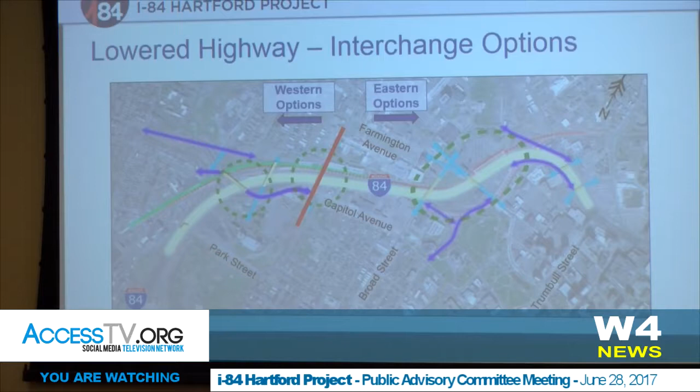So I'm going to jump into a western option here. This is the western interchange option we're recommending as part of that reasonable range of alternatives. The yellow shapes indicate at-grade roadway pavement, the orange are bridge structures, and the light blue are potential property impacts.

With Park Street here at the bottom, we've zoomed in a little bit, and Sigourney Street is towards the right of the map. Coming over Park Street, you'd have an eastbound off-ramp and an eastbound on-ramp from Laurel Street, located just south of Capitol Avenue. Capitol Avenue would be reconstructed to pass over I-84 and over the railroad, whereas today it goes underneath. There'd be a westbound off-ramp and westbound on-ramp coming to Capitol just a little bit east of Forest Street.

One of the big pieces of this option is a new potential road connecting Hawthorn Street over towards West Boulevard at Sisson Avenue. That second east-west roadway is crucial to the success of this alternative, both from a traffic perspective and from a knock-on effect where the roads are smaller and more manageable, better for bicyclists, pedestrians, and transit users.

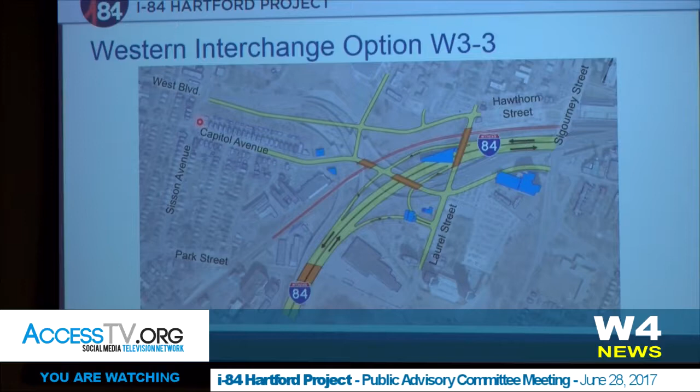So I'm going to shift over to the east now. Sigourney Street is on the left side of the map, with Trumbull Street and Ann Street towards the right and I-91 just off the page. This is interchange option 3B-E6(S), one of the three options we're proposing to advance to the DEIS. I'll walk you through some of its characteristics and then explain key differences to the other two options.

Here's the eastbound on and westbound off-ramp at Sigourney Street, with the highway passing under Sigourney Street. The red line is the railroad where it would come off its existing alignment. This orange section is a tunnel that would carry the railroad beneath Broad Street, Farmington, and Asylum, with the station located likely in this vicinity. Gina will be touching on that in the next few slides.

In terms of the interchange ramps, we'd have those Sigourney Street ramps I mentioned, and then eastbound we'd have off and on ramps from a new north-south road connecting Capitol Avenue to Asylum, continuing as Spruce Street with an extension beyond where Spruce currently ends at Church. We'd extend that up and around into Chapel Street South, creating a frontage road system.

All those pieces I just mentioned are consistent across these three interchange options as I move forward. The changes you'll see are in this area, north and west of the highway towards Asylum Hill. In this 3B-E6(S) option, we have a westbound off-ramp and on-ramp connected to the Myrtle Street, Edward Street extension, which ties down into Cogswell, creating one continuous north-south road between Asylum and Walnut Street. I'd like you to focus on this area as I page forward to the next interchange option to see the differences.

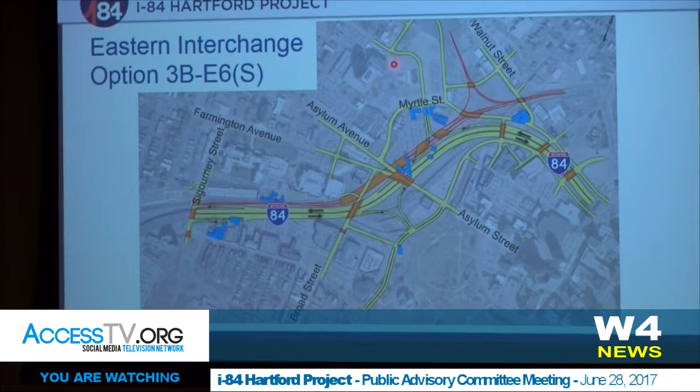So again, Christine's going to talk a little bit more about the DEIS schedule. Ultimately that process, looking at all those different NEPA characteristics, will help us come to what we feel will be the right conclusion as to a preferred alternative. So with that, I'm going to turn you over to Gina to carry you through the station.

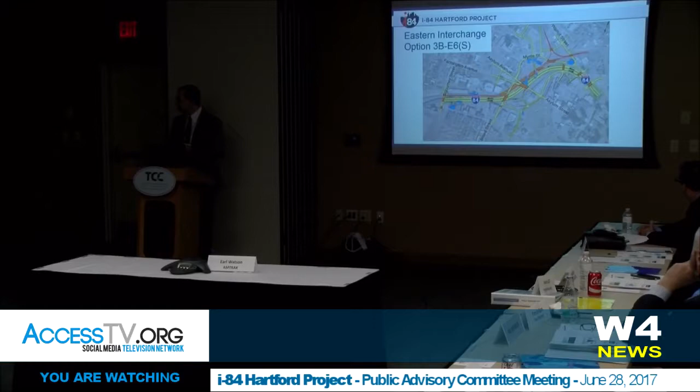Thank you. So as you're well aware, we are studying different transit station alternatives in what we're calling our multimodal station study area. This is a 20-acre site. Asylum is on the south, Cogswell's on the west, and the existing Union Station is on the east. The tracks are going to be relocated to the west about 1,000 feet, so that is the area we're looking at. It's about a 4-minute walk between the existing Union Station and the new relocated tracks to the west.

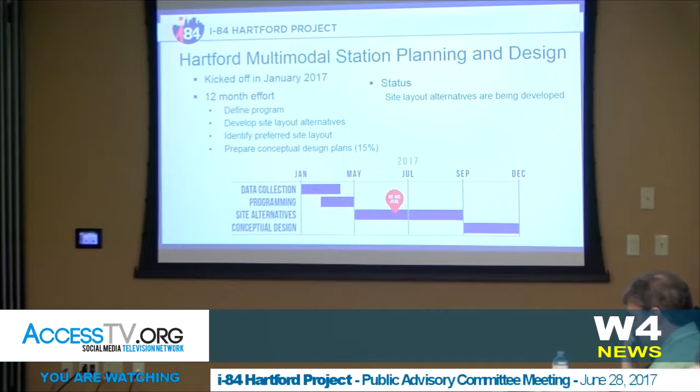We started in January. We were at the PAC meeting previously to talk about the schedule. It is a 12-month effort for what we're calling 15% design plan. So that's really locating a station layout, not designing the building per se.

So we've completed our data collection and our programming phase. That was when we sat down with the various stakeholders and users of the station and identified what type of spaces they would need in the future for their riders, their offices, their ticket agents and so on. So we've completed that programming phase, and that data is what we've used to lay out the various station alternatives on this 20-acre site.

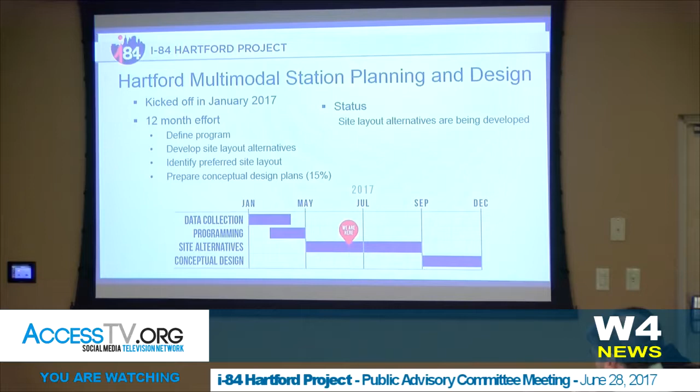So we presented at the Open Planning Studio in April. We did present 4 different station alternatives. Since that time, we've added some more, so we're now up to 7. And we did also present these concepts to what we called our Transit Technical Committee meeting, TTC meeting, where we received input from various members of the public, stakeholders, and the TTC members.

And we keep hearing a lot of the same recurring themes. We hear that there's a need for a seamless connection between bus and rail. Right now, at Union Station, we have local buses stopping, we have Greater Hartford Transit District paratransit vehicles stopping, and we've got intercity bus, Peter Pan and Greyhound stopping. The rail is now going to be moved 1,000 feet to the west. What do we do about the buses? So we understand that there needs to be some type of connection between the bus and the rail folks.

The station should act as a main regional transit center. It should also be a gateway to downtown Hartford, and to Bushnell Park area. There should be a strong pedestrian and bicycle connection. I think that is true throughout the entire project. We keep hearing that's important.

The options need to support the viability of Union Station, a historic building, and how best we can do that given the different station layouts, whether it supports transportation functions in the future, or it turns into something else, but whatever we do needs to support the viability of Union Station.

The rail tracks will be relocated at the early part of the project. 7 to 10 years later, depending on funding and how it's built, the lowered highway alternative will be built. The track level and the lowered highway alternative are at the same level, so that's the lower level of any concept we're going to be showing.

We also have safety and security concerns we need to worry about. Some of our concepts, not concept A, but future concepts I'll show you in a bit, have construction over a cap over the highway. We're in discussions right now with FHWA, FRA, and FTA about their guidelines for constructing transit stations and parking over highways, and what that means in terms of security and safety.

The other thing we need to worry about is access. As I said earlier, this station will be accessed by vehicles for the parking structure as well as buses, and what does that mean in terms of the street network around that?

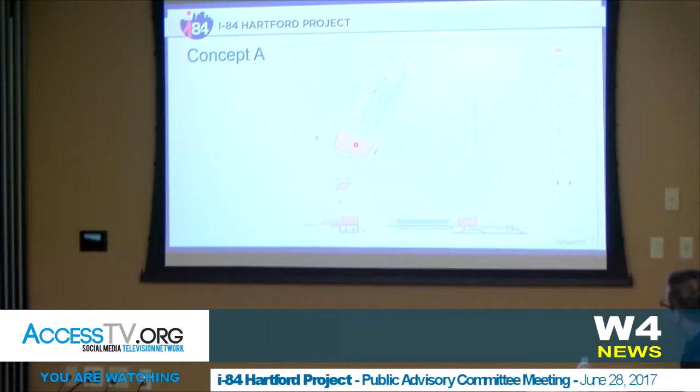I wanted to go a bit over the color coding too. The purple on each concept represents the transit station, and the transit station is going to be built at different levels. It starts at the platform level, which is at the same level as the lowered highway. In most of the concepts, above that will be a concourse.

That concourse will allow passengers to get off the rail, go up about half a level, and transfer under Asylum Street to the other side, so that they can cross Asylum Street to get on buses on the south side, or to get on sidewalk connections and go west and east at that point.

Above that is considered level 1, which is the Asylum Street level. Then, depending on the concept and the square footage of the station, there will be 2 to 3 levels above that, or 1 to 2 levels, so it may go up to a 3-level high station and parking.

Each of these concepts also shows bus bays. The blue represents local bus, Connecticut Transit local buses. The green to the right in this concept would be intercity buses, that's Peter Pan and Greyhound. We're also suggesting some employer shuttle buses, something we're also studying, so employers can operate shuttles between the train station and their places of employment if they desire to do that in the future.

Not every concept I'm going to show you shows the different levels, but I'll explain what's going to be on each level. So for concept A, this is what you would consider a true multimodal station.

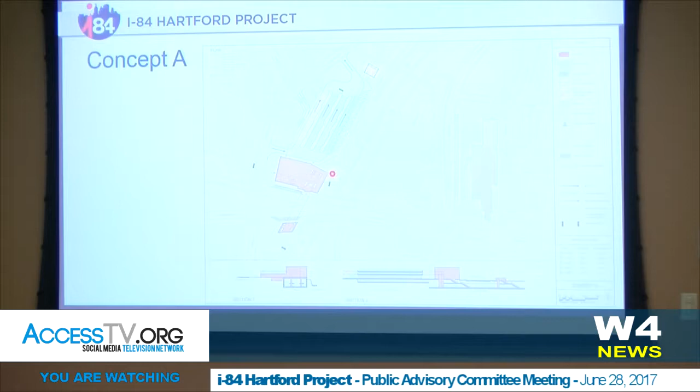So if passengers want to transfer between the rail and the bus, they would walk across Asylum, that 4-minute walk, and get to their bus, and then go to their place of employment downtown, or go to New York, or wherever they're riding on intercity bus.

In this case, the levels are the same, where this is level 1, Asylum Street level. Above that would be the kiss and ride taxi stand within the parking. There'd be a small parking facility above, structured parking.

This access, and I should be talking access too. We should be looking, as we look at these drawings, you should also notice the access. In this case, we're just talking about employer shuttle and some parking, structured parking above the employer shuttle. So that would be the vehicles coming in and off of Cogswell. The other bus vehicles would be coming off of Spruce Street. In the previous example, Concept A, everything comes off of Cogswell.

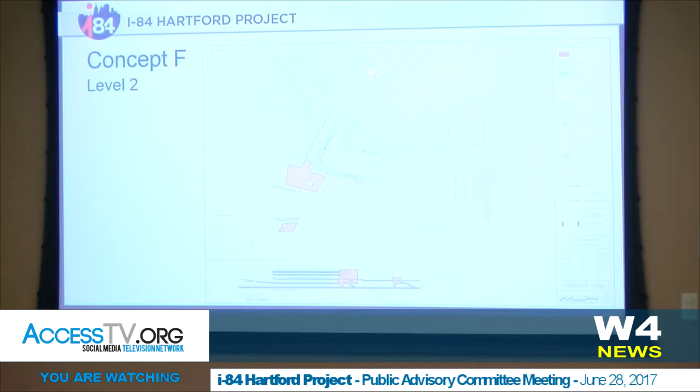And again, in this case, the access is both off of Cogswell as well as off of Spruce Street, depending on which level of parking. Excuse me, can you just show us where CT Fast Track would come into this mix? Because I'm getting a little confused, how does CT Fast Track afterward come in?

Right, for right now, CT Fast Track, for all these options except the last one I'm going to show you, will just operate on street as they do now along Asylum. The reason we would have a concourse to catch buses on the south side of Asylum is because you can catch local buses as well as CT Fast Track there. So we're not anticipating CT Fast Track to be pulling into any of these station options. They would just operate how they do currently along the street once they get off the dedicated lane.

Well, where would the dedicated lane come into this picture? It doesn't—it stops. Maybe Dave or Tim, do you want to explain? At this point, it just stops south of this station area.

Yeah, we're currently evaluating CT Fast Track options and station options at the same time, and we do have various guideway options that we're evaluating now. Some of them would terminate at Road A or Bushnell Park West, which would be very similar to what's out there today, but it has a high cost, and we're looking at other options in between as well. So we haven't come to a conclusion on CT Fast Track yet, but we are evaluating.

But would they be considered the same as Connecticut Transit? No, there would still be CT Fast Track buses, but it's really about where does the guideway end—does it end exclusively at this street or that street? So we're still evaluating that.

Because once you relocate the railroad, now the busway is on the other side of the railroad. So how do you get that across the railroad and then to the highway? It's either going under the highway or going over it, so there are pluses and minuses for that.

Now, concept G, I'll give kudos to Bill, if he's in the room. At our open planning studio, we got input from several people, including Bill, and Bill's suggestion of looking south of Asylum in order to make that connection to CT Fast Track.

So phase one would occur just at the rail station. You see the purple, and again, these are just representative of building layouts. Any of these can be mixed and matched in terms of what the shape of the building should look like, but this is just our thought of how it could fill up the space, maybe with a plaza or whatever. So phase one would strictly be this train station.

Phase two, when the lowered highway occurs and the cap gets built over it, is when we would introduce the buses and make a connection to CT Fast Track. This is the tunnel option for CT Fast Track. So the buses would come up here, and this is a CT Fast Track station.

This is Road A, correct? And then it would go out into Bushnell Park West, which is the new roadway.

Cars, on the other hand, would be coming in and parking in a surface parking lot. We anticipate that we could put a green roof over this as the second level.

So really, on this concept, we would not be constructing a parking structure. A parking structure could possibly be accommodated on the north side of Asylum as part of TOD development, but this would be a smaller parking lot, so that could be considered one drawback to the room allocated here, or possibly it would serve just the train station patrons, and you could have your TOD accommodate other users of parking.

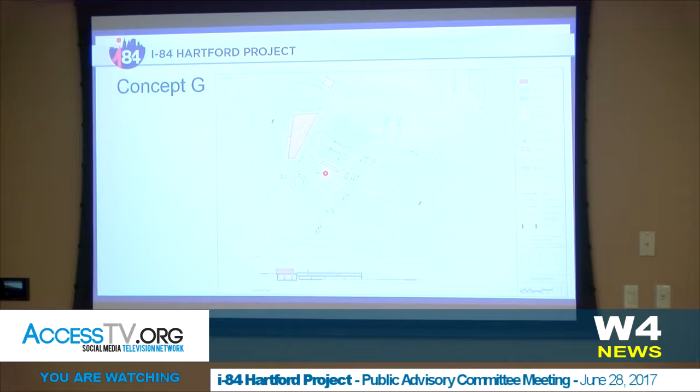Why is that one level? Is that because you can't accommodate more levels there? Or? Well, what we're suggesting instead, and it could be designed all different ways...

In this concept, we're suggesting that there be a green roof, and above for level 2. If you can see, it's kind of hard to see here, but this is a green roof that we would put over this. So when you look from Bushnell Park, you would see a green roof, but then the station itself would be a couple stories high. So you would view an iconic looking structure, but then you'd have a green roof. But that's just one idea.

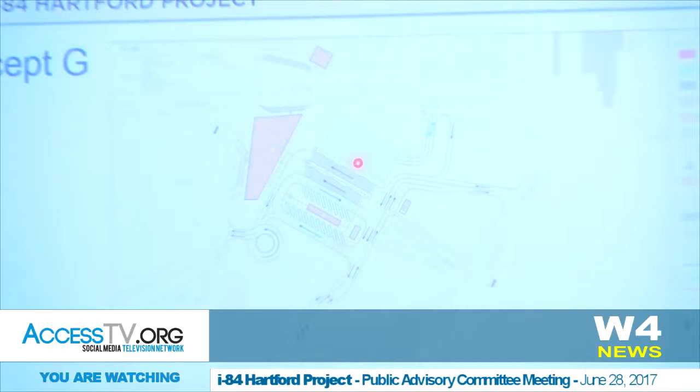So no, you could also accommodate a parking structure on this side if you didn't do the green roof, right. But that's just a different idea that we had.

Where is Asylum Street? I'm lost. Oh, okay. This is Asylum Street right here. Yeah, so Union Station is there. Oh, okay. And this is the new Bushnell Park West.

Yeah, I see. And Road A, and then this would be CT Fast Track coming out of the tunnel option and going on to Bushnell Park West. And this is local bus, this is intercity bus.

Okay, we could accommodate shuttles. This only has a couple shuttle spaces right here. You could accommodate more, different options.

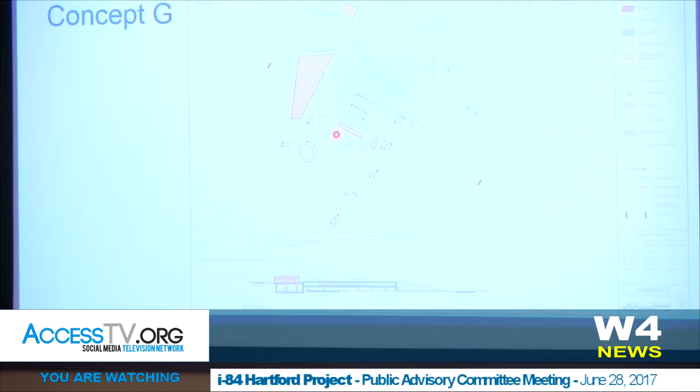So at this point, I think that was my last slide. Yes, discussion of concepts. And we do have our fine architects with us too. They can answer any questions. Yes.

And I see no serious addressing of what happens to Asylum Street as a street. You're going to be lining it with bus stops and parking garages. I mean, you don't have in your list of objectives at the beginning, activate Asylum Street. And that, to me, as a city dweller, is the single most important thing that needs to happen here.

And the second most important thing is that Union Station has to be a workable economic entity and integrated fully into Asylum Street and Asylum Avenue. And, you know, this is an engineer's dream, the citizen's nightmare. And I think you've got to have a lot more public involvement, a lot more meetings.

A lot more money. I mean, I'm pretty good usually at this visual stuff and understanding it. You just showed me what, 8? 7. 7 of 10? Right. I couldn't, you can't differentiate among them.

Well, you know, D, E, and F are pretty similar for sure. We did say at the earlier checklist that pedestrian and bike connections are very important, and that TOD and development along Asylum Street is very important. So any of those concepts would incorporate those ideas, which is what you just asked for. I heard them as objectives.

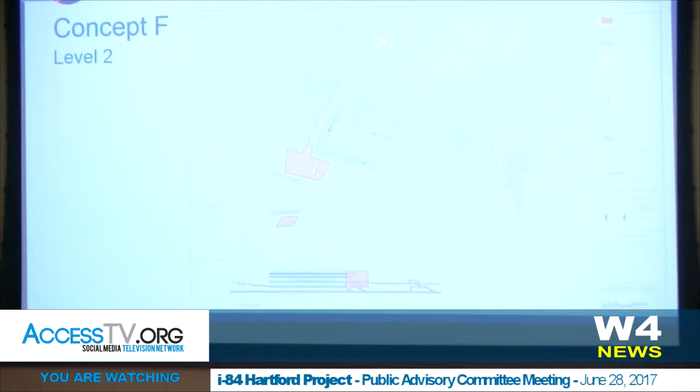So this is one of the ideas we have for the Trident. How do you drive from north to south? Where are the closest north-south entrances on either side? There are a couple of places for that. When we looked at the traffic, 80% was going east-west—it was only that 20% that would have to find another route, and there are two ways to do that.

This doesn't show either one of them, so you'll have to trust me, David. There'll be other meetings where I can show you that. And if you don't, I'll find another slide. Hold on—well, I have it.

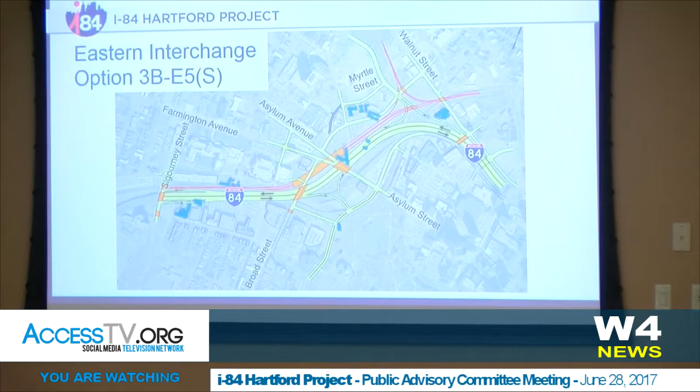To make the Trident work, what we found is if you want to accommodate every single movement, there's going to be that link, bigger intersections, and more congestion. So if you take that one conflict out, it'll be a bit of an inconvenience for those cars, no question. But overall, it might operate a little bit better.

So do it from my house. When I get there. You already took out Flower Street, remember? Oh, can't start with that.

This north-south route serves people that live in the city who want to go north-south, not just people going in and out of town. So coming up here, we can come down and do this to the city, or come down here and go to the city this way. And if you want to get to Capitol, this is the way right here, or through Sigourney. So this way to Sigourney, or over here to Asylum Place.

This is not a done deal. This is something that we found that works for the Trident. There's more evaluation to be done. Again, not final, but this is something that we felt worked the best out of all of the options that we've seen.

So this isn't really a question as much as it's a concern. When it comes to autonomous vehicles and the future of mobility, all of our research indicates there's a sea change happening, with more ride sharing and ride networks that people will belong to rather than car ownership. The way people get around within the city is going to be different. There's going to be less need for parking and more need for mobility. So I want to encourage you to consider that.

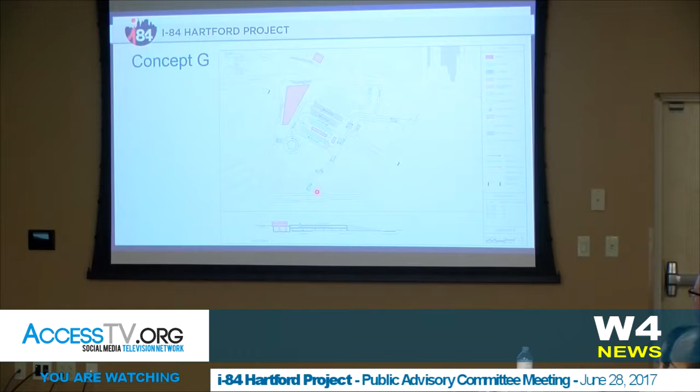You're talking about the highway option in the future? I'm talking about where the highway and CTfastrak exits onto Asylum now. This would be west of it? Yes, west. Thank you. Trying to gather my orientation. Okay, I've got it. Thank you.

I think what you need to remember is that the transit riders, the train riders, all forms of transit people, are the customers for whatever retail goes in there. So it seems to me the impact on economic activity and retail should be a much higher priority concept in your planning for the transit. In other words, every single one of these concepts—you could probably throw out half of them just on this basis—should be evaluated early on for whether it's going to support economic activity. I know I went through this with the goals and objectives, and I know that can't be the top-level purpose.

Well, this is just to vote to change that, because we are at the point in this project, the location of this project, where all transportation totally merges with all the economic issues. It just seems to me you've got to elevate the impact of the transit alternative we're considering on the economic activity that's going to occur.

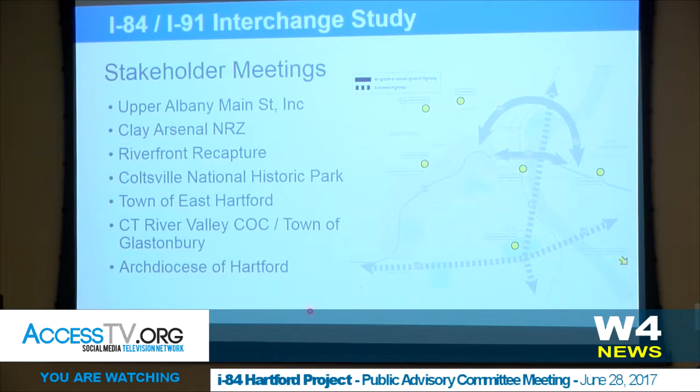Just getting some feedback or introducing the study and the concepts and getting some feedback. Nothing dramatic at this point. There are various levels of interest, and of course big questions about the viability of being able to afford these very bold proposals, but it's just a way to introduce the project to a number of stakeholders.

Our next steps this summer will wrap up formally our needs and deficiencies analysis. We're going to formulate a purpose and needs statement. In the fall, we'll have some preliminary results and some general concepts, certainly more detailed than what you've seen here. We do plan to have public meetings, an opportunity to continue the conversation with the public on the station and other aspects of the viaduct project. Then in 2018, we'll do our final analysis, our final reporting, what our suggested path forward might be, in a final report. Any questions on the interchange study before I turn it over to Christine?

Yes, Jackie. The funding for the I-91 and I-84 is separate though? Yes, we have a limited amount of money for the interchange study. That's all we have right now is money for a study. Right, and they're separate. Yeah, Joe.

The interchange option where it could potentially be moved north and west, or just northerly, as you said? That would address the concerns about the 3 through lanes on 84 going down to 2, because that interchange would be moved up prior to that congestion, right? Yes, that's right. We would bypass that bottleneck, which is the existing interchange. We would create a new interchange in that northerly alignment with 91 to the north in the North Meadows area. Yeah, we bypass the bottleneck, which is key to accomplishing our goal.

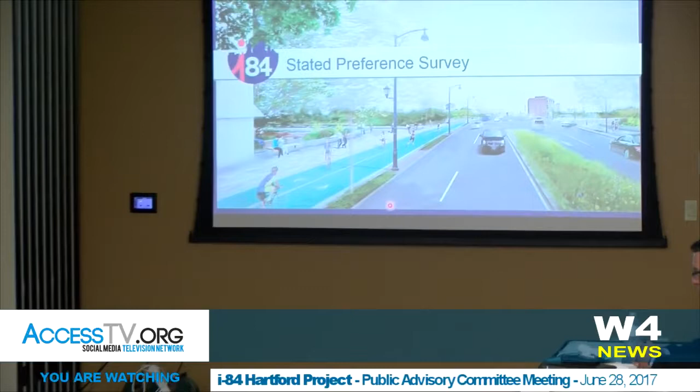Over the next couple years, we're really going to start concentrating on how to build this. We talked a lot about some conventional options that might take 7 to 10 years, maybe some more accelerated methods that, as Rich alluded to, pull that Band-Aid off quick - a little more pain, but there actually could be a lot reduced time frame.

So we really want to see what the reaction was. We take this survey, and one of the big things is get them into transit. You mentioned Connecticut Fast Track, the new rail service. We want to get as many people out of their cars, onto transit or other means as possible, and what it will take to do that. So that's really what this survey was about.

Some of the things - how many in here took it? I think there's probably, did a lot of people take it or not? Aaron? Okay, so you kind of saw the questions.

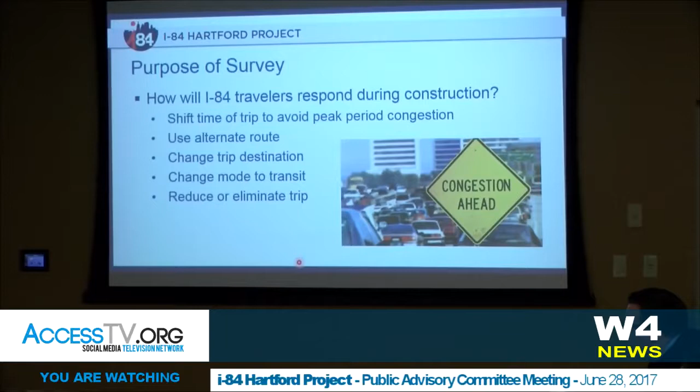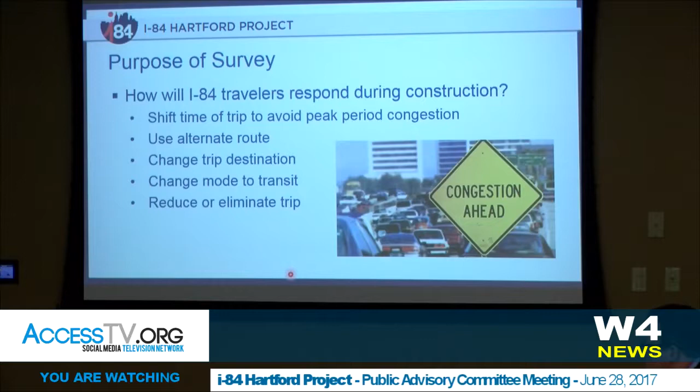They were really geared towards a lot of congestion - what will some congestion do to you to change your patterns? Will you switch your time or peak period? Use alternate routes? Try to change a destination - maybe your destination will take you out of this area. Big thing was the mode to transit. We really want to see what it would take to get people into transit or reduce trips. So those are really the questions we kind of asked.

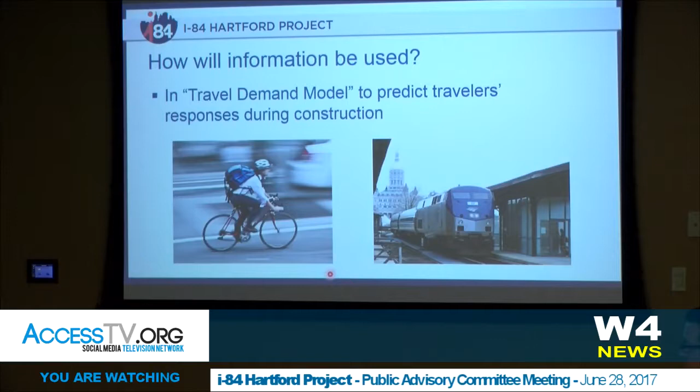So what are we going to do with it? We got a lot of data, and this will help feed into our travel demand model, which is a huge model we have of all the traffic in the area. It also handles transit use, so we can look at some factors, and based on the congestion and what we actually do to the roadway, we can predict how many people will switch to transit. So the whole thing really goes back to this model.

We did a lot of different methods to collect the data. We had direct email distribution, almost 500 people. We did a lot of in-person intercepts - I believe in a lot of libraries along the corridor, got almost 500 there. A lot was through direct connections, either through our website or through some of the businesses in the area, and I get to give Mike at Aetna credit - I think a good portion of this was Aetna, they did a great job. Those are a lot of the perfect people we wanted - right in the middle of the corridor, and a lot of them drive every day to work and back. So that was a really good selection of people we captured.

So what we found is the trip purpose - a lot of it, 60%, was to and from work. Perfect, because during this analysis we're really mostly concerned about the congested periods in the AM and PM. So that's a really good capture. There's 40% of a lot of other different things - I mean, I took it from our Meriden office to here for a business meeting, and that would be work-related. There are a lot of other categories there that we did capture.

So what did we find? What did people say would make them change from drive-in mode into transit? What we found is about 28 or 30% basically said no, nothing will get them to change. I guess those are the older people maybe, I don't know - they won't get out of their car, or maybe they can't, they really only have that as a means. But 72% were positive that they would consider some form of transit. Certainly the severe traffic delays is one thing.

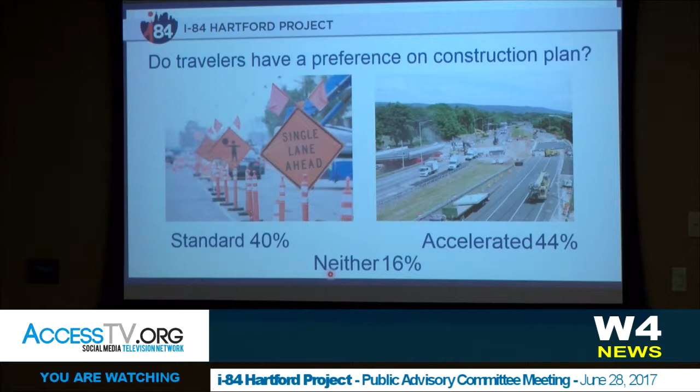So we tried to get some results on that. Really wasn't very strong either way. We had 40% that liked the conventional method, 44% accelerated, 16% neither. I think as we get the options further developed and how we can do this, we'll probably look at this again and try to refigure that. I think a lot of people don't really understand - there was an explanation in the survey what the difference is, but it's probably hard to really relate that.

Okay, any questions on the stated preference survey? And we're going to have Marcy just finish it up with the outreach.

Just a comment - wouldn't it save a lot if instead of starting up a new employee shuttle, you gave them a bus pass since it is an intermodal transportation center?

Yeah, basically some of the employers, I think Aetna is a great one, really do encourage their employees to use transit. Some don't, but we've heard from the city that they would like, and what we're doing is we're actually doing a survey right now to some of the bigger businesses to see if they would be interested in doing shuttles. So we're not sure if that's something they would want or not. We actually are going to be polling them probably within the next month or two.

Well, I had a question, would they give out a bus pass that might... I agree. Yeah, the question is on it in terms of transit benefits, would you give your employees transit benefits? Is that the survey? Oh, there you go. So we do have something like that. Yep, great, thanks Gene.